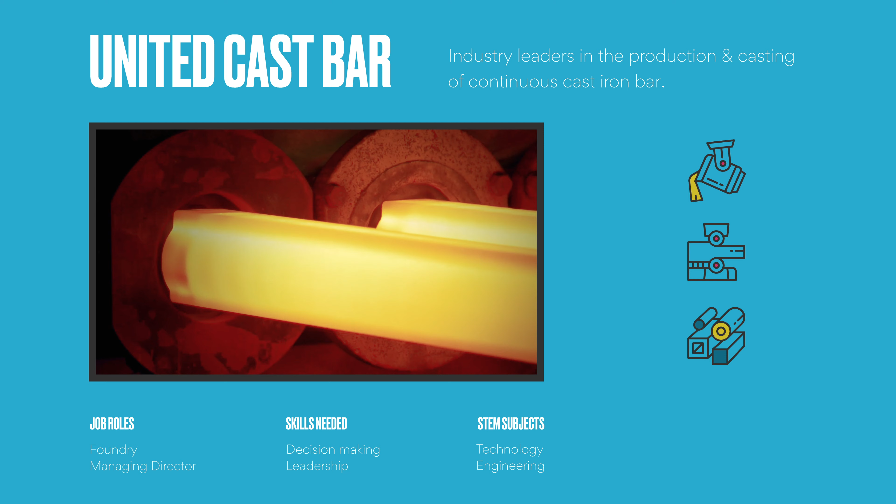United Cast Bar is a pan-European group of companies producing and casting continuous cast iron bar. We've got two manufacturing sites, one here in Chesterfield and one in northern Spain in Zaragoza.

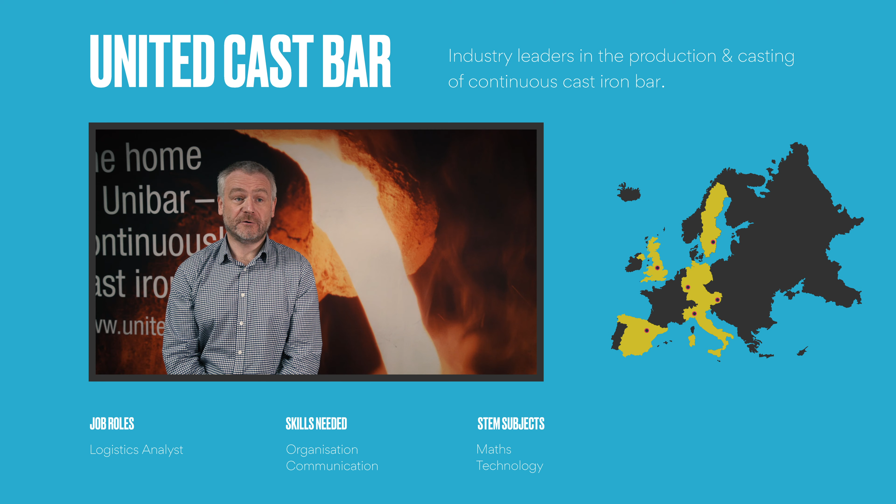And we've also got a warehouse and a distribution outlet in pretty much every country across Europe. Most of what we make here, we're selling overseas. 90% of what we're making is going to export. The other 10% is staying within the home market.

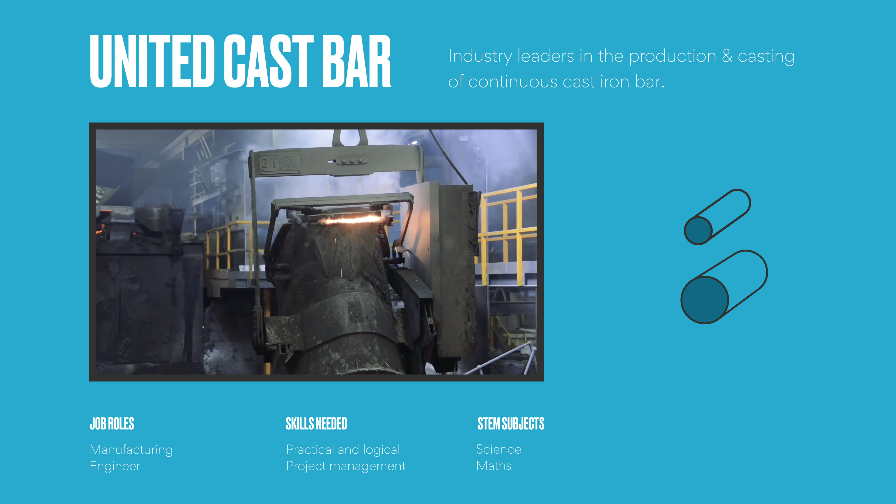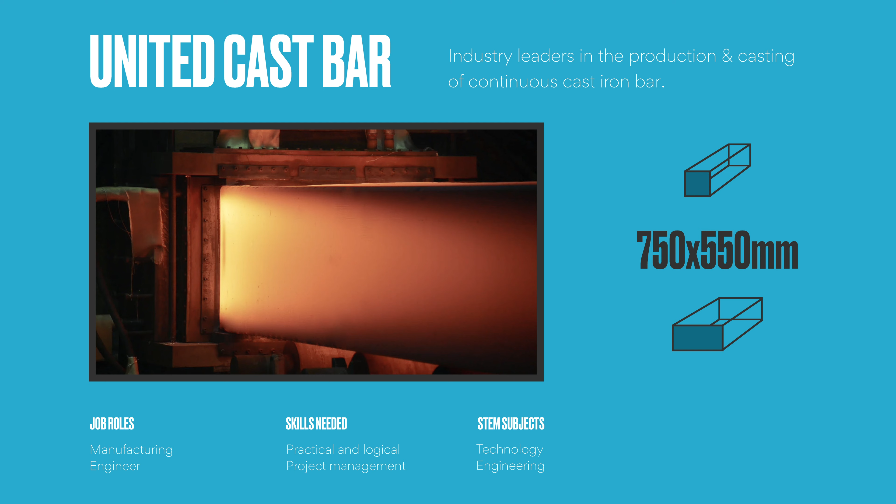We've got the broadest and the biggest portfolio of anybody within our peer group in the world. We're making bar from 25mm diameter all the way through to 700mm diameter, and squares and rectangles all the way from 40 by 20 through to 750 by 550, 650 by 510, 535 square.

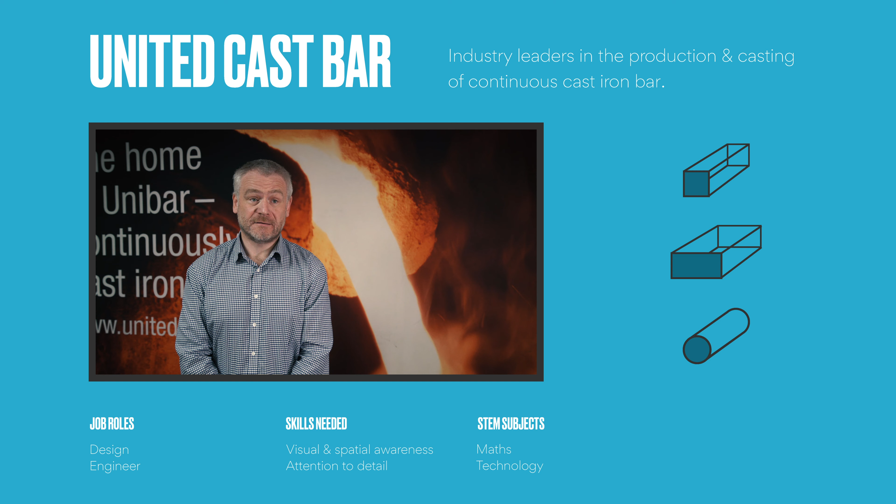We also make and have pioneered different profiles and different shapes. So other than squares, rectangles and rounds, we're also making clover leaves and near net shape production for our customers.

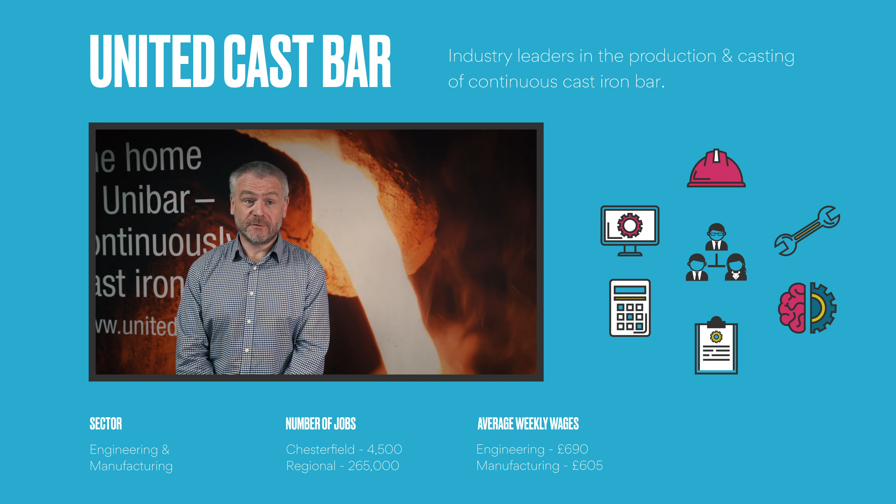Here at United Cast Bar, we've got a plethora of roles available for people coming straight from school or straight from university to come and work in.

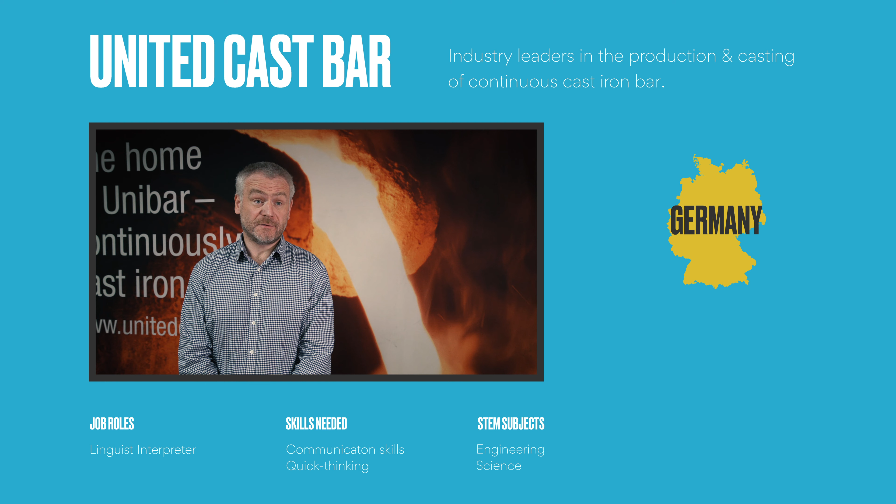Obviously United Cast Bar is selling material all over the world, not just here within the UK, so we need people with languages. Our biggest market is Germany, so we have German speakers. We deal a lot with our sister company in Spain, so we've got a Spanish speaker. One of our other biggest markets is Italian, and we've got an Italian speaker.

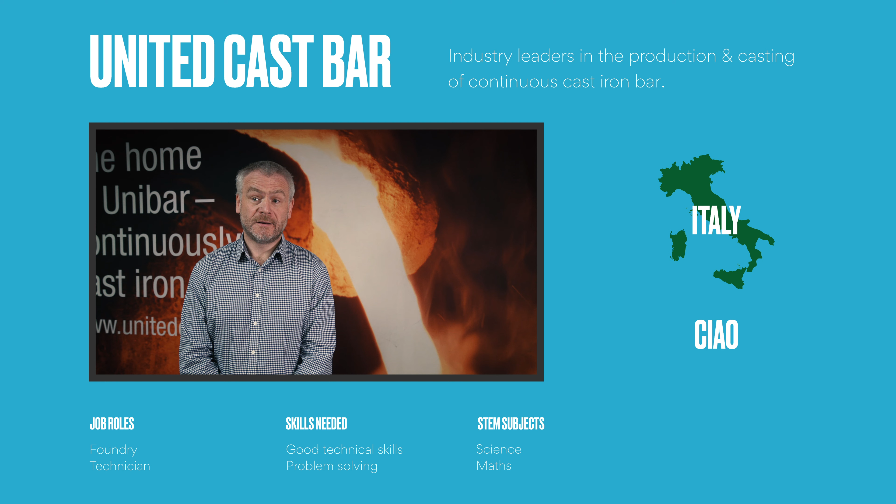We also need not just workers on the shop floor working on the casting lines, but we're also needing accountants, HR, salespeople. We need people who can manage IT.

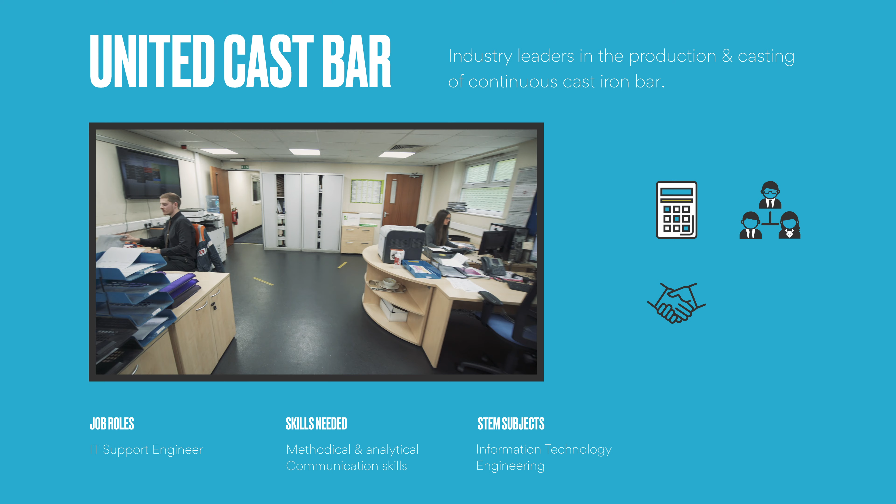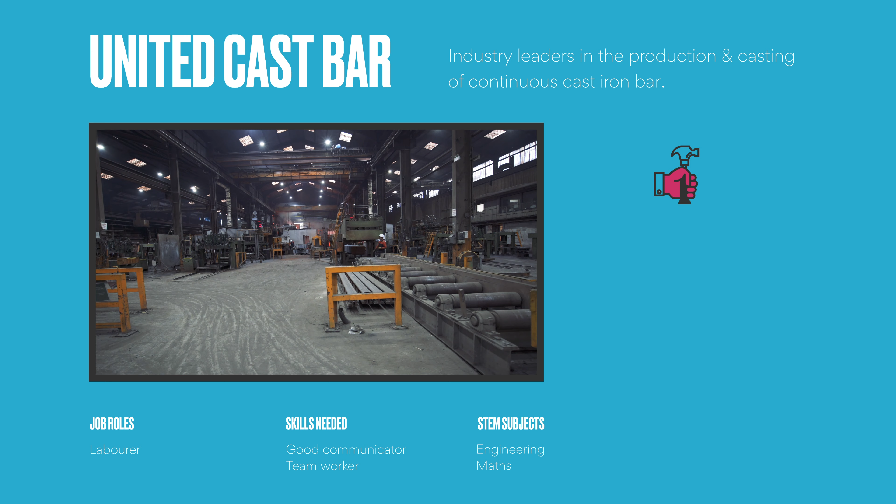Out on the shop floor, we've got a plethora of roles that we need to fulfill and satisfy. Those range from working on the end of the casting lines in simple labouring jobs all the way through to production metallurgists and supervisors. We need engineers doing design work on new profiles and new systems that we want to use in our production process.

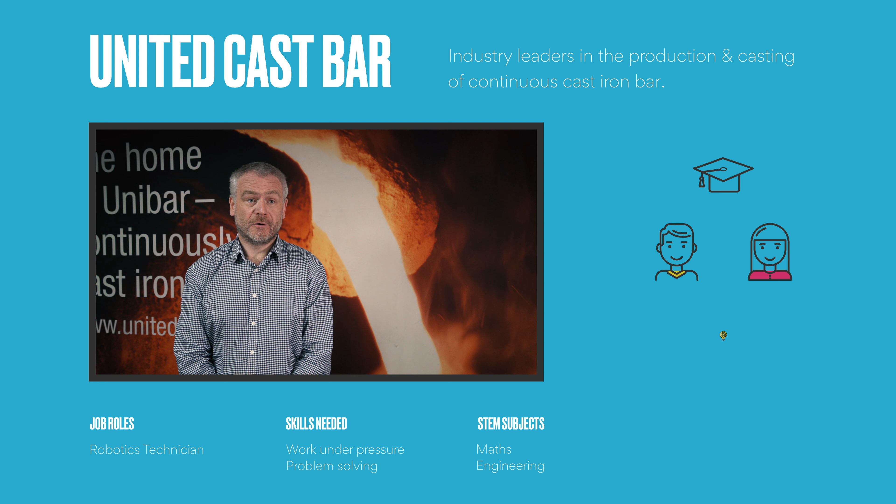We need CNC machine operators. We take on apprentices every year to work not just in the maintenance department, but also looking at all the new techniques needed for robotisation, automatisation and digitalisation of our process as we move forward into the future.

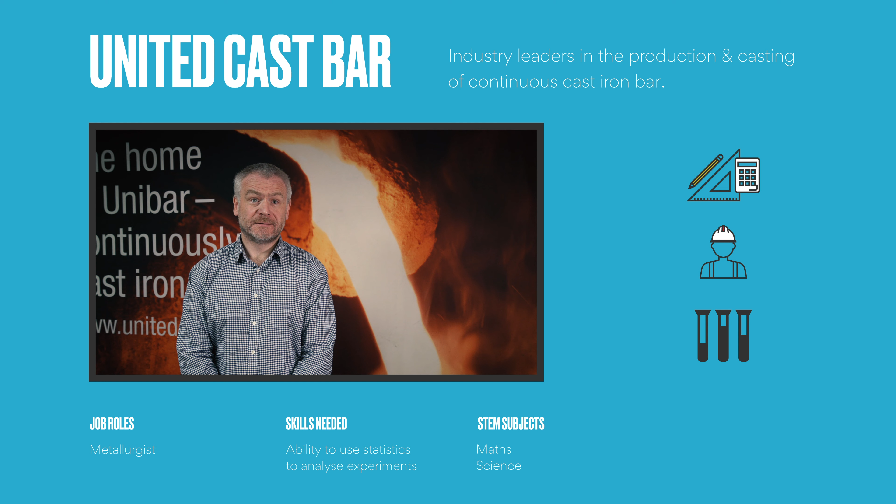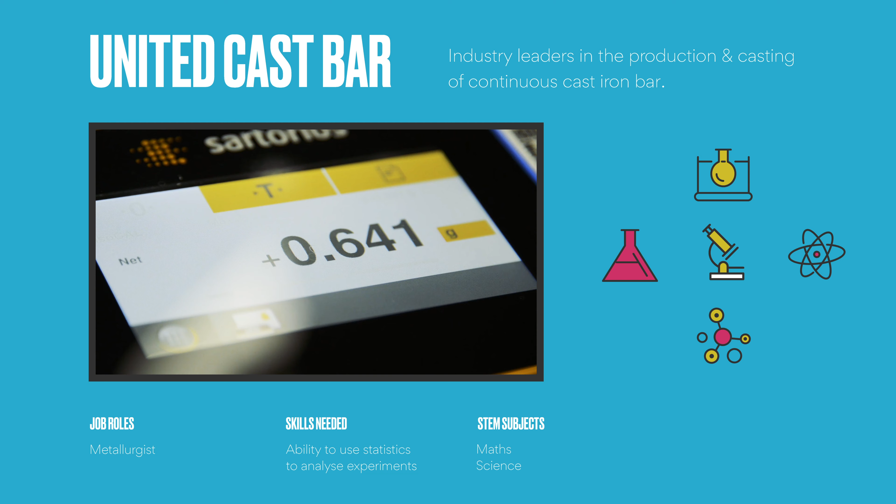We certainly need a lot of people that understand basic maths and the sciences. In metallurgy, for example, we play around with different chemical analysis and have to calculate different chemical formulas to achieve the required products we're trying to make.

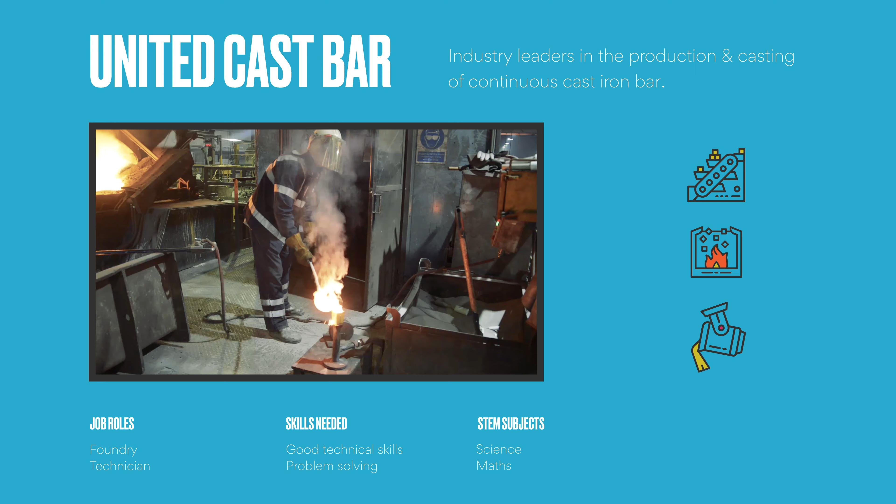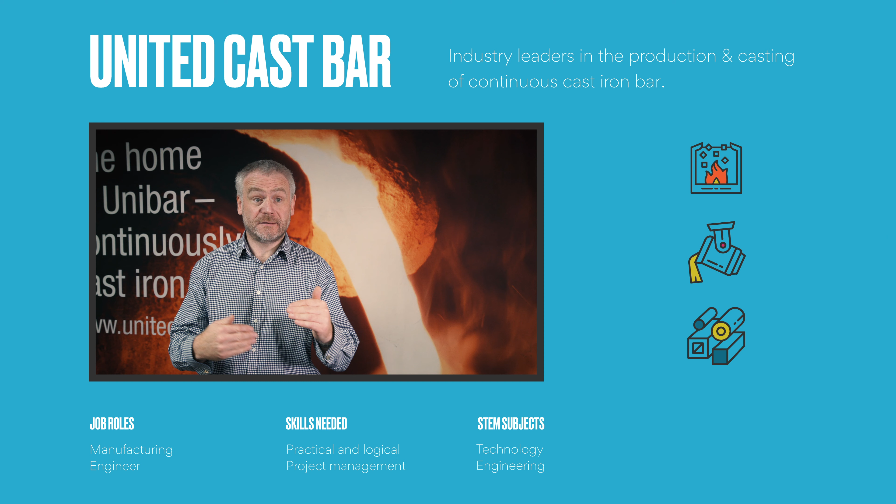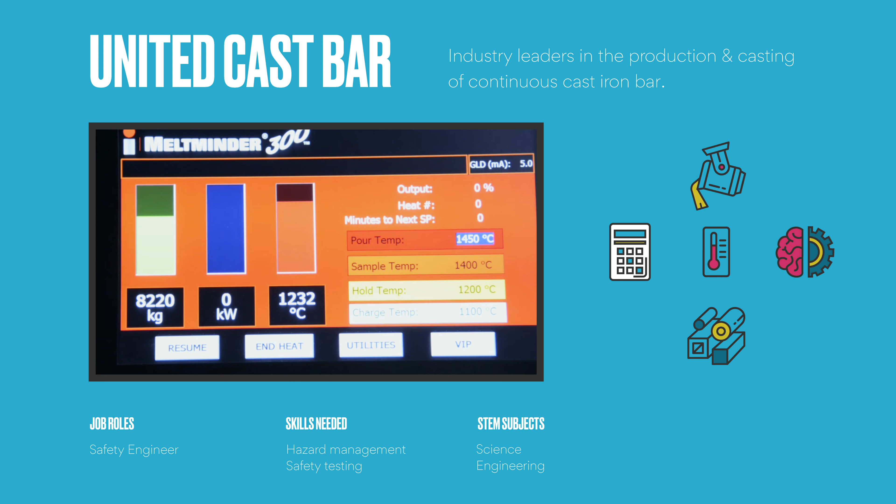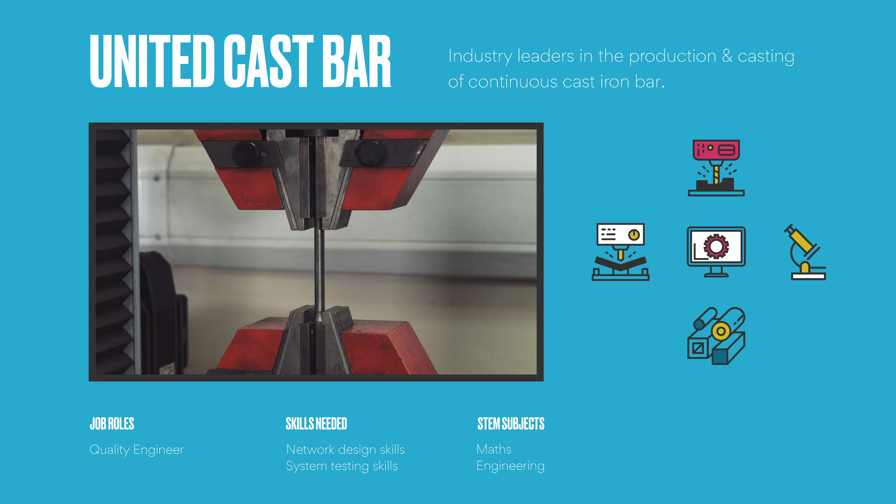Once we've made the product, we have to calculate the cooling temperatures that help us take our material from liquid to solid. Then once we've actually made the material, we have to test it. So we have to machine it and pull it apart to make sure we understand how strong and how tough it is, so our customers can work safely and operate safely in the application the material is going to be used in.